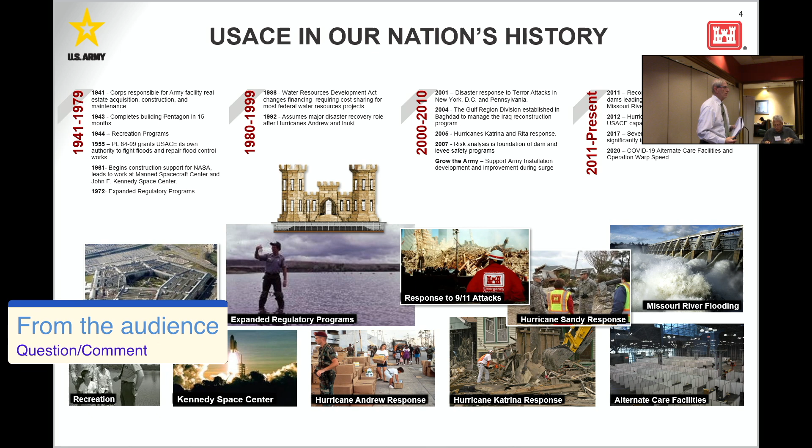Today, Chris, yes, you said hydraulic engineers? So what is that in your field? In my field, that's helping the water move in various directions, whether that's through canals or water control structures. I've done a lot of work on dams personally.

So in 2001, we responded to 9/11, helping clear the disaster field, which began our involvement in the global war on terror. And we did nation building in Afghanistan for many years, providing Afghanis housing, schools, hospitals, and other facilities. So just a brief history there, just to give you an overview of all that we do. Even today, we're working in the recovery of Helene in North Carolina, in Milton down in Florida. And who knows what the nation has for us next.

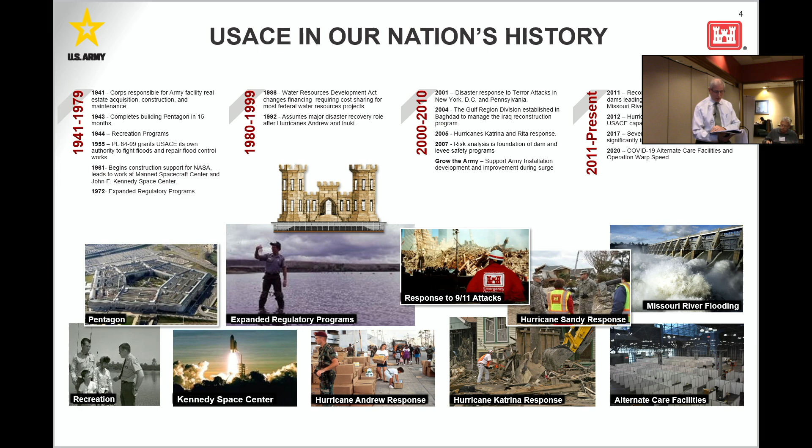So the Corps of Engineers is really a civilian agency. We have about 800 officers that are our leadership, but almost 40,000 civilians throughout the nation. And we're not just engineers, we're architects, we have construction managers, scientists, technicians, project managers. Just like any company, we have HR, counsel, contracting and finance, and real estate. We really do a lot of things for the nation.

Just like companies that have strategic plans, the Army has what they call campaign plans. And ours is based on delivering vital engineering solutions with our partners to secure the nation, energize our economy, and reduce disaster risk.

And everything we do is built on people. People are our most valuable asset. And you can see our 4 principles: people, readiness, partnerships, and innovate. And again, we have 4 lines that we work around. National support, whether that's natural disasters or national disasters. Modernize - again, just like most companies, we want to be on the cutting edge. We want to improve our partnerships. Everything we do has a partner, whether that's a local government or a military facility.

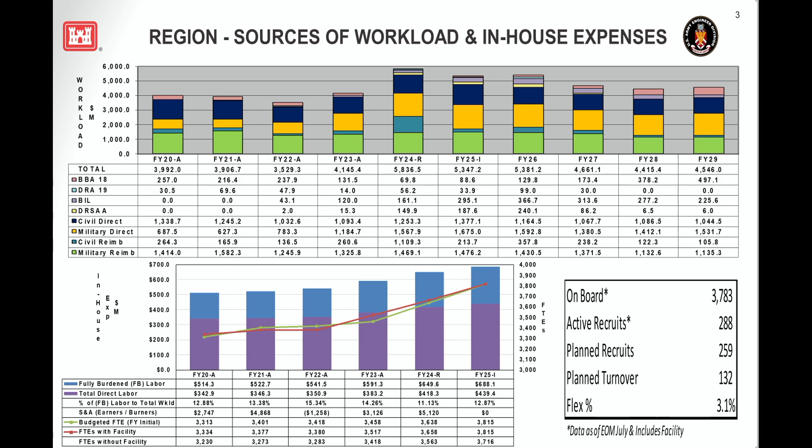Again, there's the river boundaries, and our Caribbean district, which we just stood up in July.

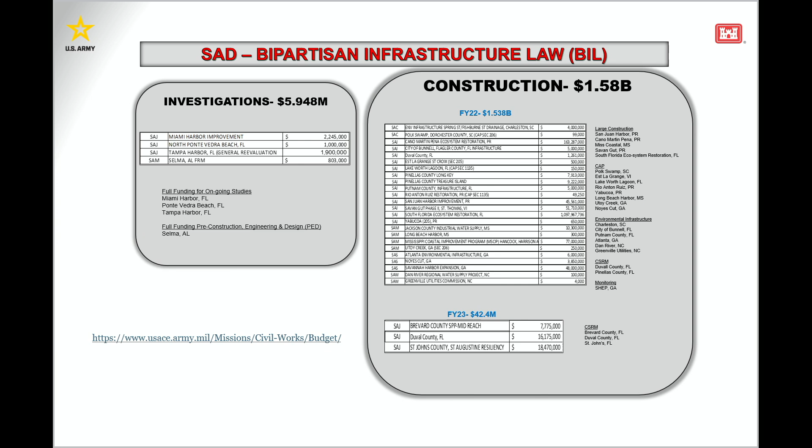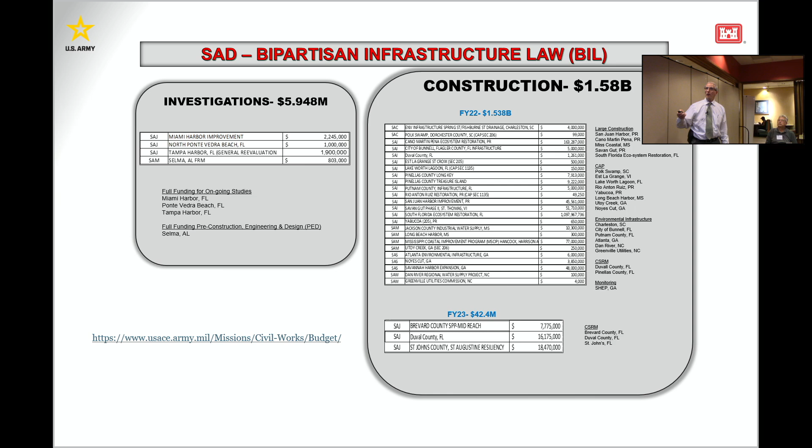Following Hurricanes Harvey, Irma, and Maria, Congress passed what's called the Bipartisan Infrastructure Law bill, as we call it. We got another $1.5 billion of construction projects to do, plus investigations or studies that lead to projects - we don't quite know what the answer is, but we have planners that study our watersheds and recommend things. We also got $400 million of projects to help us repair our infrastructure.

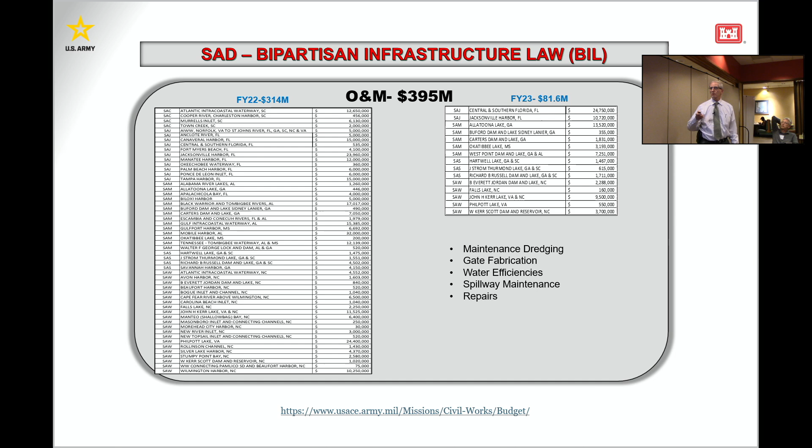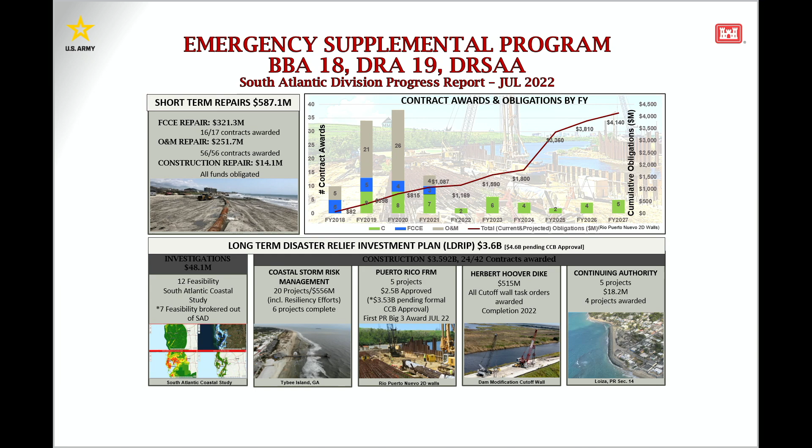One of the things we're working on is replacing all of our steel with fiber reinforced polymers that have a longer life cycle so we can save money in the long term. You can see the spending on the bill, and the bulk of it went to Puerto Rico - they're up to about $5 billion in projects with hurricane recovery. We also got some money for Herbert Hoover Dike, which I'll talk about a little later on - it was the Corps' largest dam safety rehabilitation project ever.

One of the things we did following Irma and Maria is a comprehensive study of the South Atlantic coast, all of the southeast coast including the Gulf. We identified where the most risk was. Oop, excuse me a second.

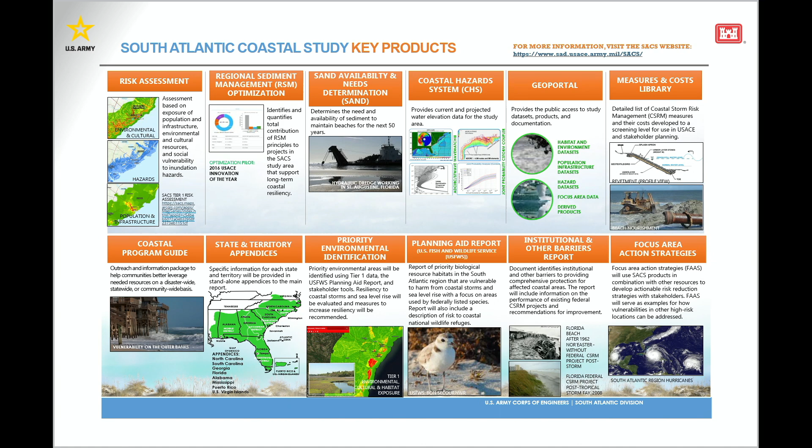We studied where the most risk was, and where the sediment was - where's there sand that's good enough to place on our beaches? We looked at coastal storm hazards, what could come towards us, and also a bunch of strategies to help both local governments and the federal government protect our vulnerable coasts.

Our population in the United States has migrated towards our coast. Therefore, every hurricane represents new challenges and economic disasters for us.

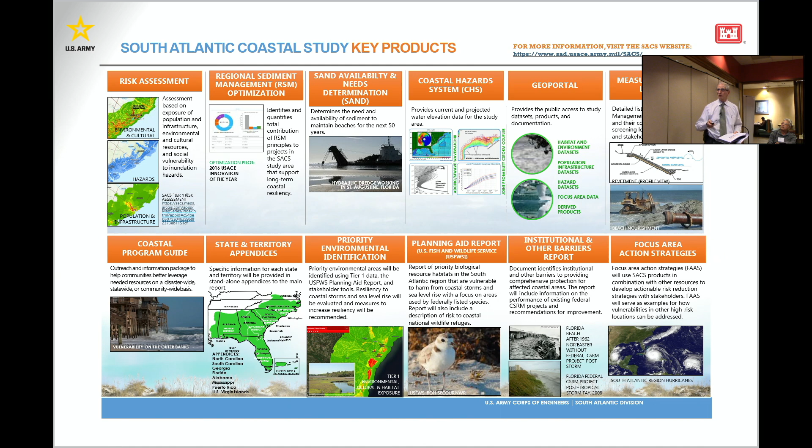So I'm going to cover some of our business lines in the Southeast. Again, I'm trying to go fast to be conscious of time.

So we have, what happened? I think you hit the blank. I hit the what? You have a blank on your... No, I'm good, I'm sorry.

So in the Southeast we have over 5,000 miles of navigable channels. Inland waterways, we have the Tenn-Tom Waterway, which goes from Mobile all the way up to the Ohio. Barges will go up light-loaded, cut over to the Ohio River, and come back down the Mississippi fully loaded. We have 33 navigation locks and 10 major harbors that we maintain.

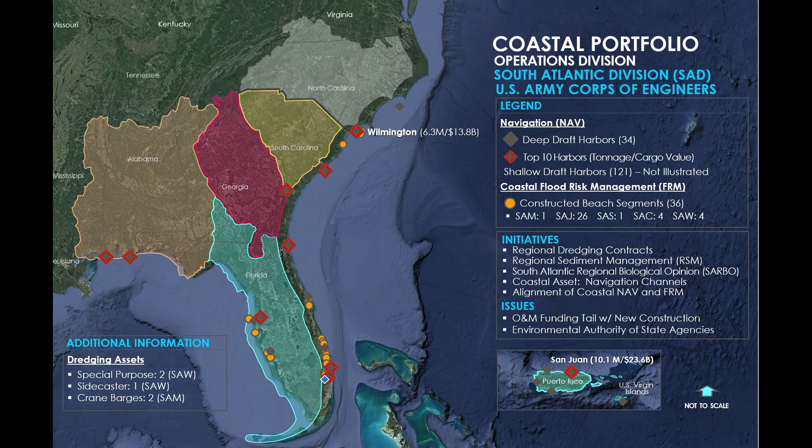We also maintain a lot of beaches. Beaches aren't just for recreation - they actually serve a purpose of preventing damages inland. We design dunes, we design jetties, we design breakwaters, and provide protection to these communities.

Now, I will say that the federal government makes investment based on benefits. So we have a large group of economists that determine what the benefits would be of our project, and it has to have a BC ratio greater than 1. Most likely they're greater than 3 to compete for funding.

We also have a number of deep draft harbors, and I'll talk about some individually, but the biggest ones are Miami, Savannah, Charleston, and Jacksonville.

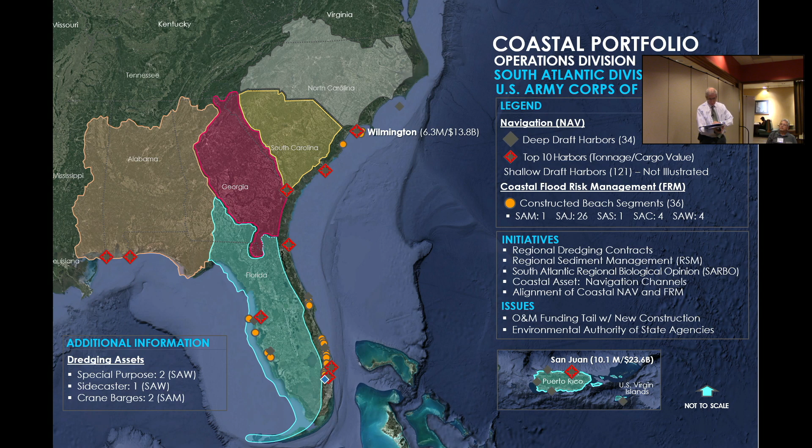We also maintain our own shallow draft fleet of dredges. Industry is not interested in going to small harbors, and so we have 4 dredges that we maintain in our Wilmington district. They can go in and get to the small harbors that are important to our local economies. It's the only shallow draft fleet in USACE, and we do a lot of work on the Atlantic and the Gulf, keeping those small harbors open.

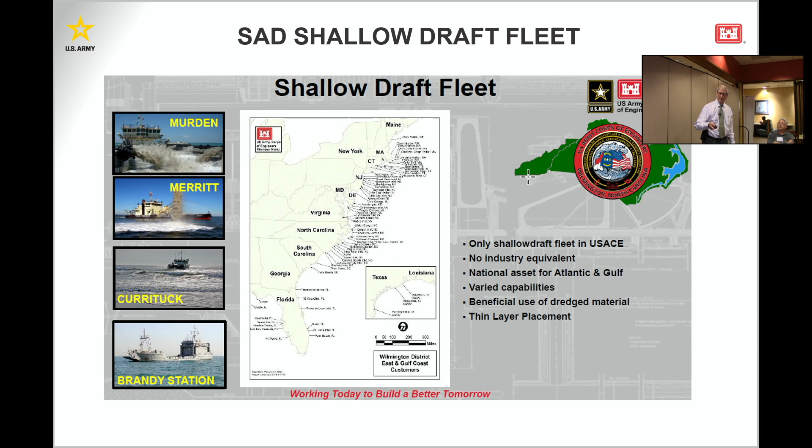So after the third lane was added to the Panama Canal, Congress told us to hurry up and deepen our harbors so that we could take the bigger ships. These became what the administration called the 'we can't wait' harbors under President Obama - again, Miami, Savannah, Charleston, and Jacksonville.

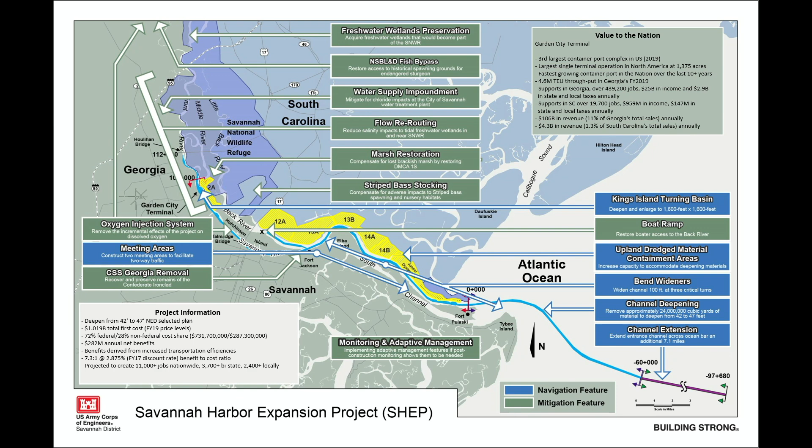This is a graphic of the Savannah Harbor. Has anyone ever been down to Savannah and seen all the big ships come in? Right? So this project came in at just about $1 billion. 500 million of it was these green boxes, which was environmental mitigation for deepening it.

We had to build a reservoir of fresh water to keep the salt water back. We had to build dissolved oxygen facilities to pump the river full of oxygen for the fish. We did a lot of marsh work up here, and then we got to deepen the harbor through the terminals here - I guess that's Garden City, but anyway, these are the terminals.

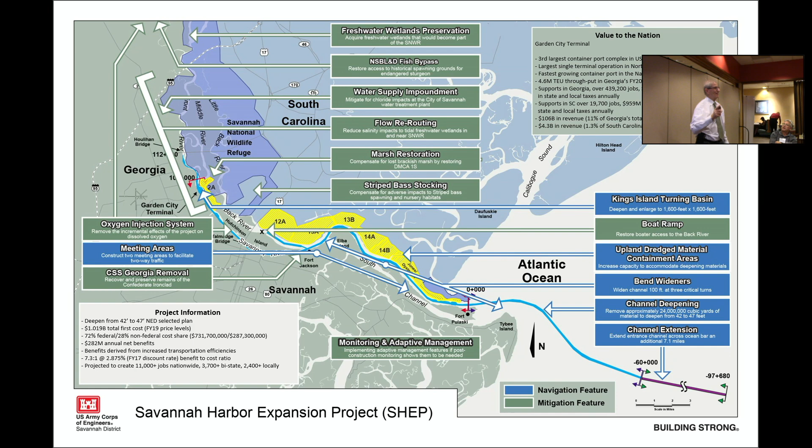Now, the limiting factor getting into Savannah Harbor is the Talmadge Bridge. And you may have seen articles that Congress is considering raising that bridge, so get the ships in.

Jacksonville Harbor, same thing - with the bigger ships, we went from 42 feet to 47. A lot of cars come into Jacksonville, and also the Marines have a big terminal at Blount Island.

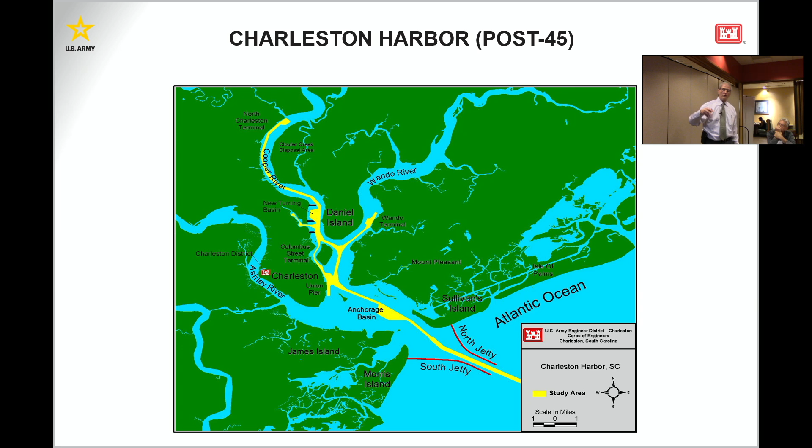Charleston Harbor was originally 45 feet deep. We went to 52. If you own a BMW, it probably came in through Charleston. Charleston is one of the biggest where cars come in the most - we call that roll on, roll off. Cars will roll on from United States manufacturers to go overseas, and they'll roll off from foreign manufacturers.

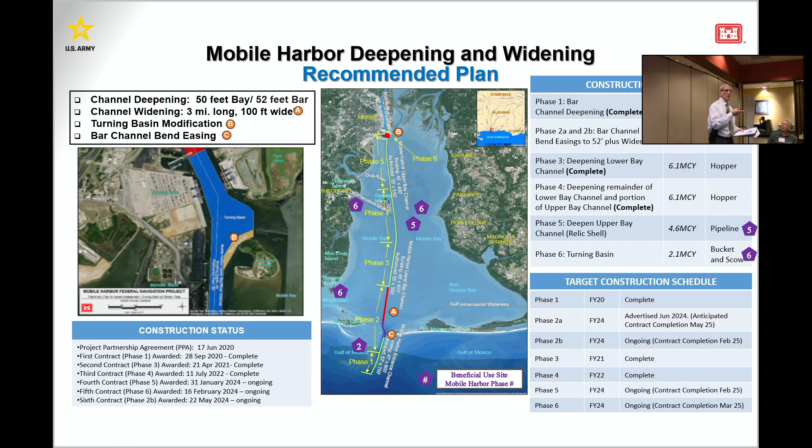We're also looking at harbors in Gulfport, Port Everglades down in South Florida - that's where Florida gets its gasoline. Brunswick, I'm sure you're familiar with that, a lot of cars go in there. And Wilmington Harbor up in North Carolina.

So other than harbors, we also have a lot of multi-purpose projects. We have 33 diverse projects in our division. We have 55 dams, but 33 have these project purposes. We generate hydropower, we mitigate for flood risk, we support navigation, water supply and water quality, fish and wildlife, and of course recreation.

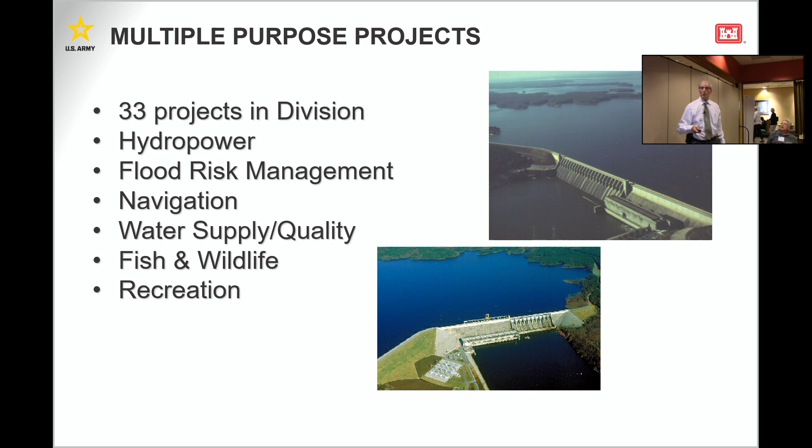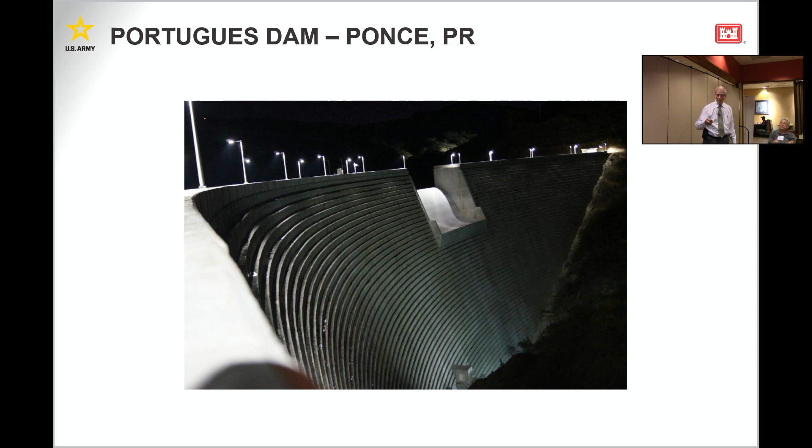This is a project that I'm very proud of. I worked on it personally. The Portugues Dam in Ponce, Puerto Rico. It's a flood control dam. It is a roller compacted, thick arch dam, and it's sized for a seismic event, an earthquake of 8.4. Very, very large dam, completed maybe about 10 years ago.

We're also good stewards of the land. We have big environmental programs and mitigation lands. We take care of 35 threatened and endangered species. We do timber harvesting and timber management, and that money is returned to the Treasury. We also have park rangers and other workers that help maintain our diverse ecosystems. We'll talk about Everglades restoration in just a few minutes. You can see where we have environmental stewardship projects.

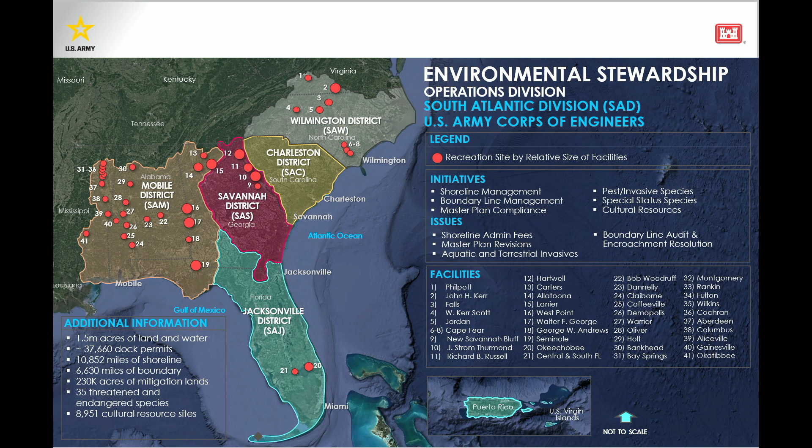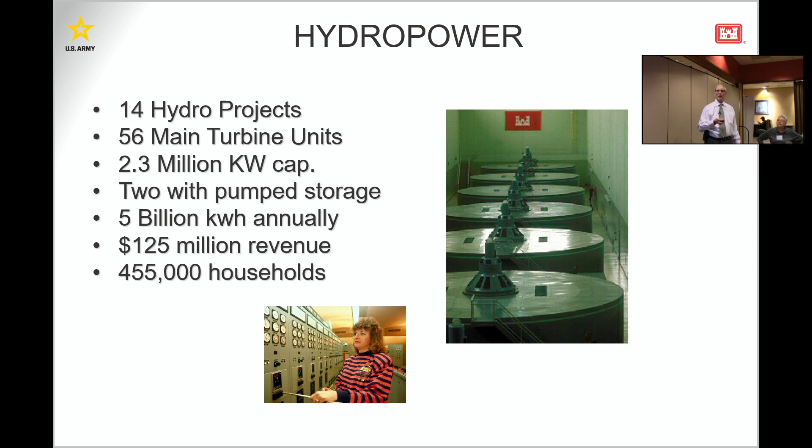Hydropower. We have 14 hydropower projects here in the southeast. We're the second largest Corps of Engineers generator; the Bonneville projects in the Northwest are number one. We have 2.3 million kilowatts capacity, with 2 using pump storage. At our Richard B. Russell project in Georgia and our Carter's Dam up in North Georgia, we generate power during the day. The water goes downstream and is captured in a pool, and at night we pump the water back up the reservoir when power is cheap, then sell it again the next day. A very good way to generate revenue. Our power is marketed by the Department of Energy through the Southeastern Power Administration. You can see all of our hydropower units.

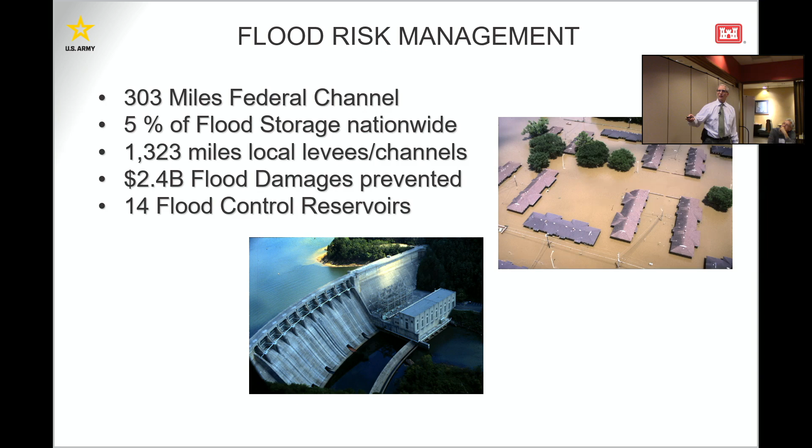One of the things we do is flood risk management. Dams are not there for you to go boating. They're actually there to prevent flooding. So what we do is capture the flood coming out of the mountains, and then let it out slowly, either through hydropower units or through the gates, and prevent damage. We've prevented $2.4 billion worth of flood damages over the last couple of decades, and we have 14 reservoirs with that purpose.

I talked a lot about South Florida restoration. It's one of the largest ecosystem restorations in the world, 16,000 square miles, basically going from Disney World, Orlando, to the tip of Florida, Everglades National Park. A very complex and controversial project.

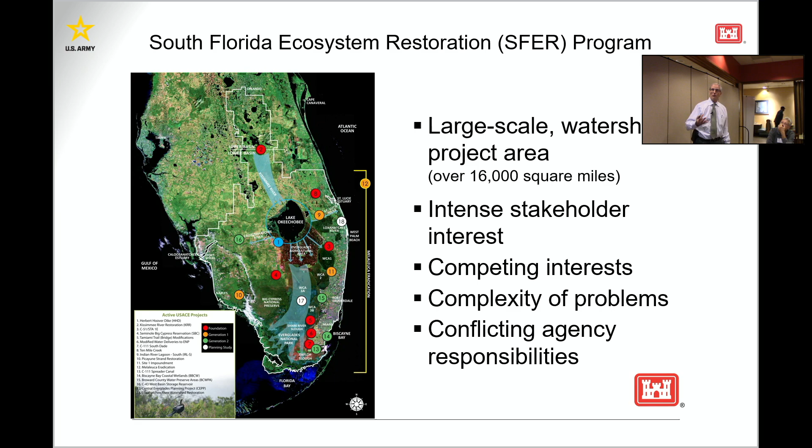Before man took over Florida, the marshes would typically overflow, go through Lake Okeechobee, the second largest freshwater lake in the United States, and overflow into the Everglades. Then in the 1800s, a Philadelphia lawyer named Hamilton Disston came and figured out how to dike and drain the Everglades—you've heard of selling swampland in Florida? He was the original. So the Corps of Engineers came in and made Swiss cheese out of South Florida. We can direct the water almost any way we want, basically cutting off the natural ecosystem.

As values changed over the years, we are now working to restore that ecosystem, to maintain a more natural flow through this corridor back into Everglades National Park, while still maintaining our other project purposes. That reservoir you were asking about will go right about here, capturing these floodwaters and then sending them out to the Everglades. The Everglades restoration is all about changing the water timing, its distribution, its quality, and reducing the pulses.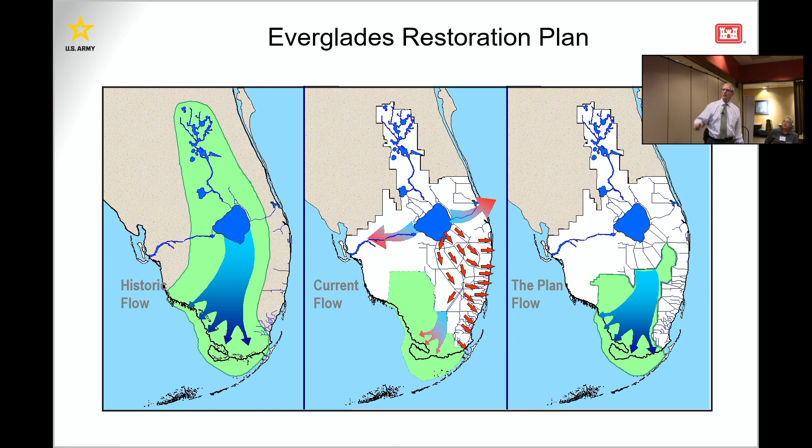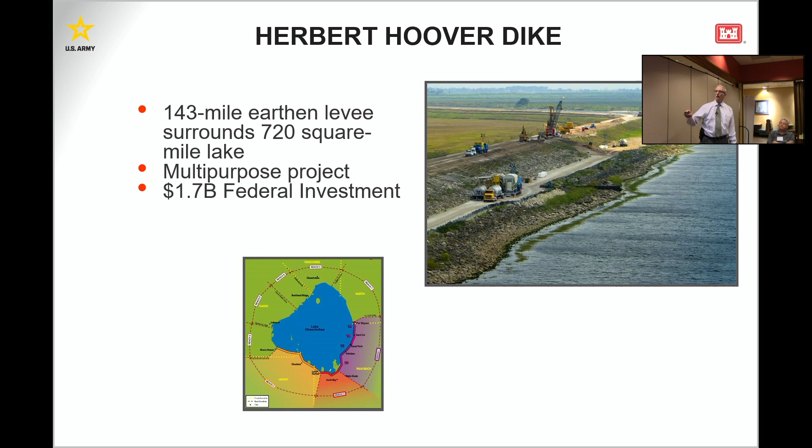In the 1920s, like I said, Lake Okeechobee is the second largest freshwater lake in the United States. A hurricane came, sloshed the lake, killed about 2,000 people. Congress told the Corps of Engineers to go build a dam around it. So we built a 143-mile dam, except it was built in the '20s and made out of sand. That thing leaked—it was dangerous. So over the last decade, we've made a $1.7 billion investment and put in a deep cutoff wall all around the lake. Really what it is, is a series of dams that we rehabilitated.

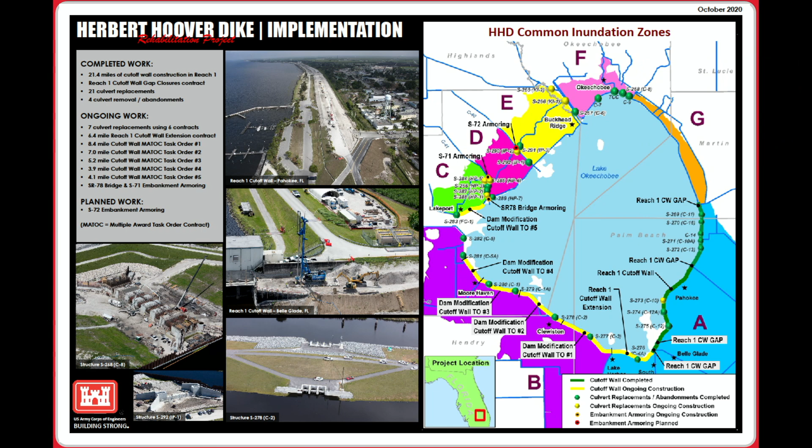You can see how we did it—each one is unique. There we are in our heyday, having deep foundations put into the dike. You can see here's the lake, and this is Highway US 27. If that lake went over, we'd lose many of our winter vegetables and sugar cane here, so a lot of economic damage would have happened if that lake had breached the dike.

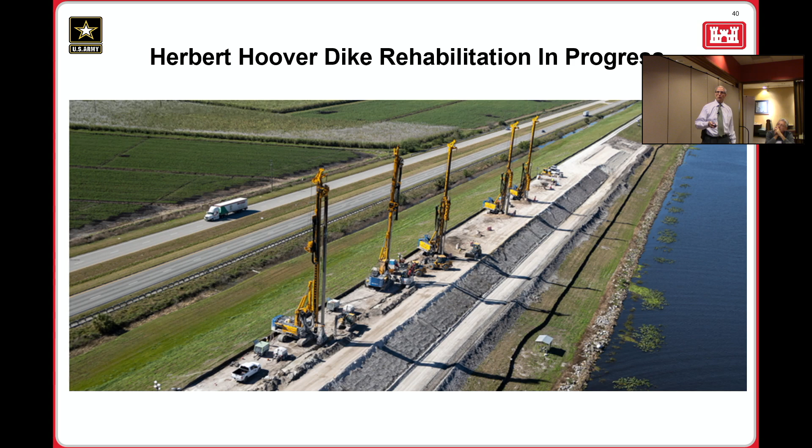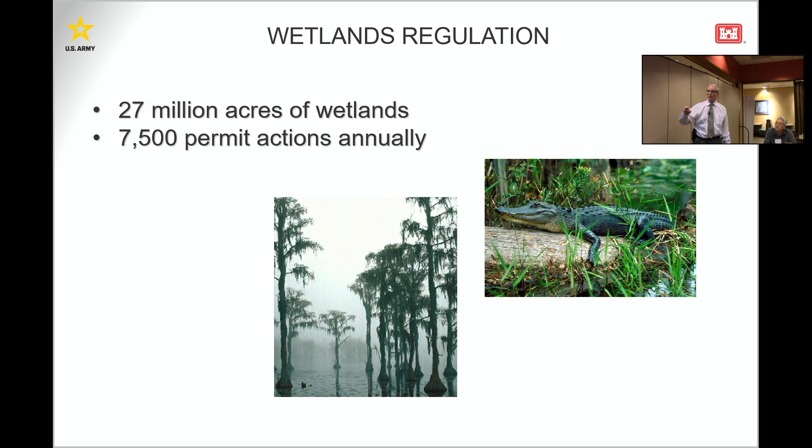We're also a permitting agency. Along with the EPA, we enforce the Clean Water Act. We give permits for builders to fill in wetlands, and we manage 27 million acres of wetlands ourselves. Don't ask me anything about permits because I'm an engineer, but this is how we do our permitting.

That's the civil works side. That's the fun side. But we also support the military. One third of the Army is here in the Southeast.

Congress just changed the name of a lot of things, so I'm going to use both names. Fort Liberty also used to be Fort Bragg up here in North Carolina. Fort Jackson, Fort Gordon, Fort Stewart, Fort Moore, which used to be Fort Benning, Fort Rucker, which is Fort Novosel. I'm drawing a blank. And then we have all of our Air Force bases. We also do a lot of work in Central and South America for the Armed Forces.

And also work at Patrick Air Force Base and Fort Moore. We have four-star headquarters, four-star generals that reside here in the Southeast. During the BRAC days of the early 2000s, we built four brand new headquarters. At Fort McPherson was FORSCOM.

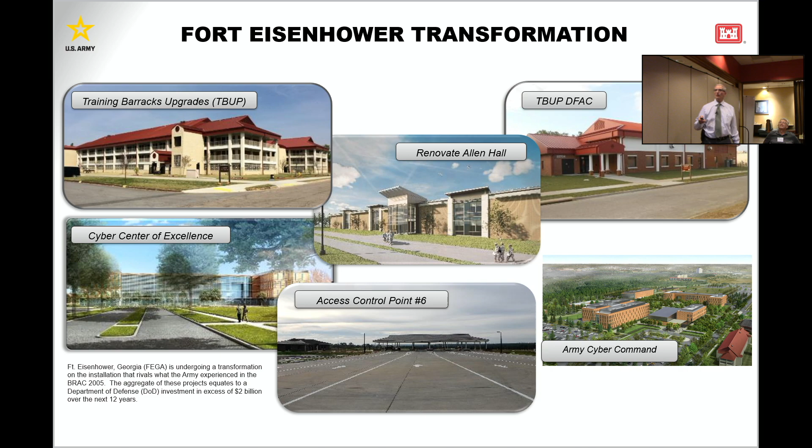Redoing the barracks, we built a cyber center of excellence, which is actually connected to an NSA building. And if I told you what happened there, I'd have to kill you. So, but Army Cyber Command, a big campus where our soldiers will train in cyber warfare and conduct cyber warfare. And again, a lot of infrastructure that goes with that. New barracks, new roads, new access points as we transform sleepy little Fort Gordon into a power projection platform.

A couple of years ago, Hurricane Michael came through the Panhandle of Florida, wiped out Tyndall Air Force Base. Almost every facility was there. The Air Force came to us and said they wanted to build the base of the future. So we're actively working there right now, transforming that base, basically a clean sheet of paper.

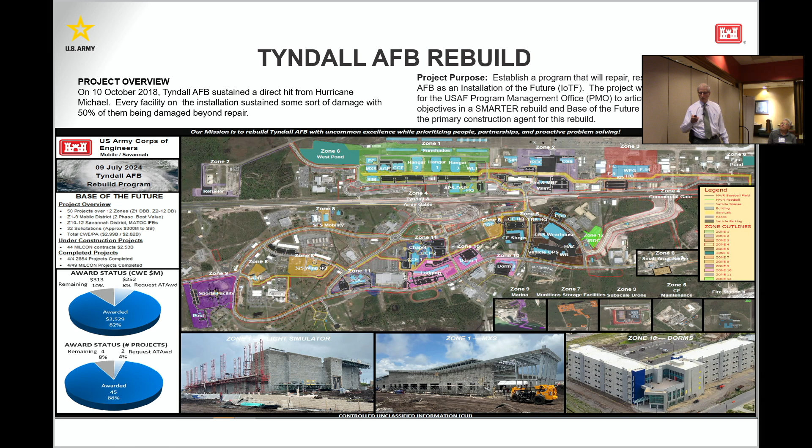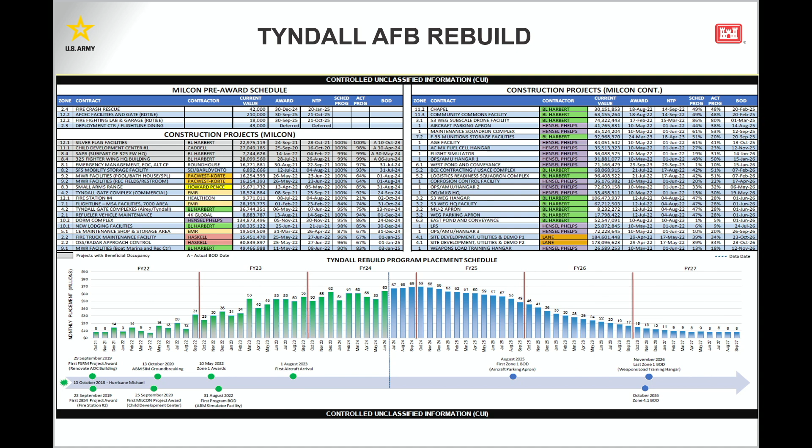You can see the workload. We have 50 projects in 12 zones that we're working: new runways, new hangars, new lodging, new barracks, medical facilities, everything our Air Force would need to train their fighters at Tyndall.

We also do international agencies support work. We work for other agencies. A lot of our customers are down in Central and South America, drug DEA, drug interdiction. We support ambassadors building clinics and things for women as they try to get freedom and democracy out, counter drug, and also work for NASA, ATF, FBI, just about every agency that you can think of.

Question, what does CONUS stand for? I'm sorry, Continental U.S. And OCONUS is overseas, other than Continental U.S. I'm sorry, good question. I'm the Army, we speak in acronyms.

And lastly, I want to talk about emergency response and then open it up for questions. So we are the nation's engineers. No other agency has as many engineers or the ability to contract for engineers like we do. And often we find ourselves addressing emergencies, whether that be through civil works.

We have our own authorities, the Stafford Act, that allows us to go in and address emergencies. We have Public Law 84-99, which allows us to go in and rehab infrastructure. We've responded to the Haiti earthquake. We've been to Australia, we've been to New Zealand.